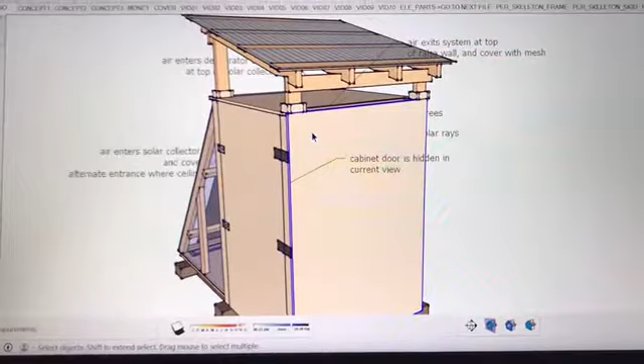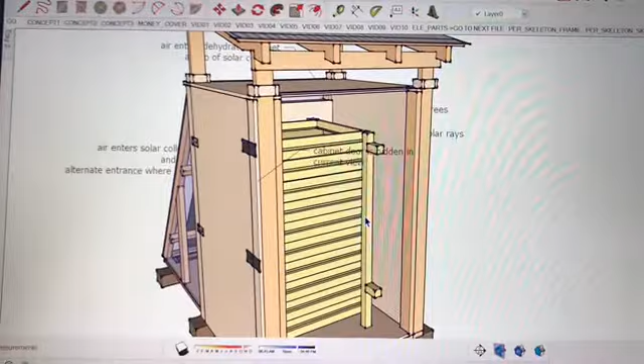that are going to be joined together, say inside this exterior sheathing up against this 2x4, or inside of this interior wall surface between it and the 2x4 that's beyond it. And in a previous video, we talked about the weather stripping along this, but felt could be used in between these surfaces here.

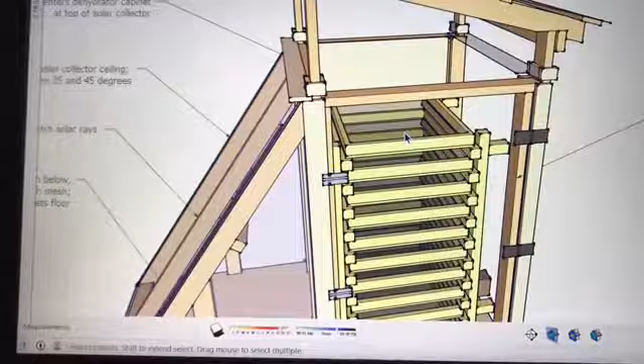This is all to increase the efficiency of your airflow, because that's what the solar dehydrator does, is it flows drier air fast through the system rather than being extremely hot. It's all about air movement. Where do we have more surfaces? Do it at the bottom.

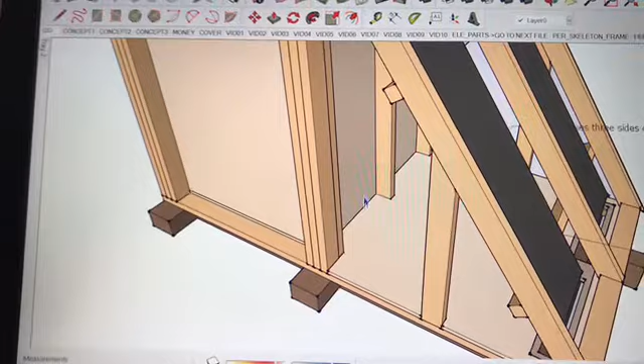Make this glass. I'm hiding things whenever I'm doing that. That was either glass or plexiglass, whatever you're budgeting. So here at the base of the wall, you could put more felt there. Don't create a gap with your felt. Use the felt to your advantage. Okay, this has been edit number 5.